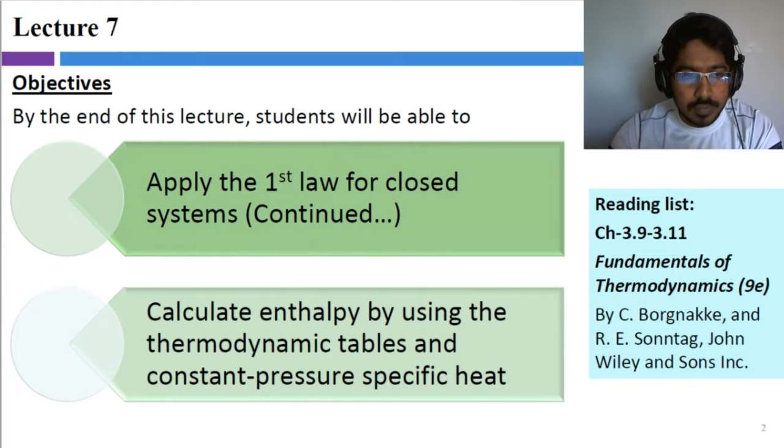Okay, here is some information that you were looking for about the midterm. So this 60-minute time frame, I will increase it. This is the number that I originally planned, but hopefully I'll increase it. And the midterm exam is 35% of the total final grade. And as I mentioned earlier, there's a mock exam uploaded for a paper-based exam. And then one question was uploaded in the Canvas quiz format, right? So that you can go there and practice yourselves. And please make sure that you have a PDF scanner to scan your answers, right?

This exam is not like the previous one, right? Sorry, give me 1 second. 29th. Okay, sorry, my bad. It should be rectified as 28th. It's on Friday, definitely. This one is wrong, and 28th, right?

So then you have to keep a PDF scanner, and when you are doing the mock question in the Canvas, you can use the PDF scanner and scan your workings and upload it there, so that you know the process beforehand. Otherwise, don't wait until the last moment and until the exam to test your technology. That will get you into trouble, right?

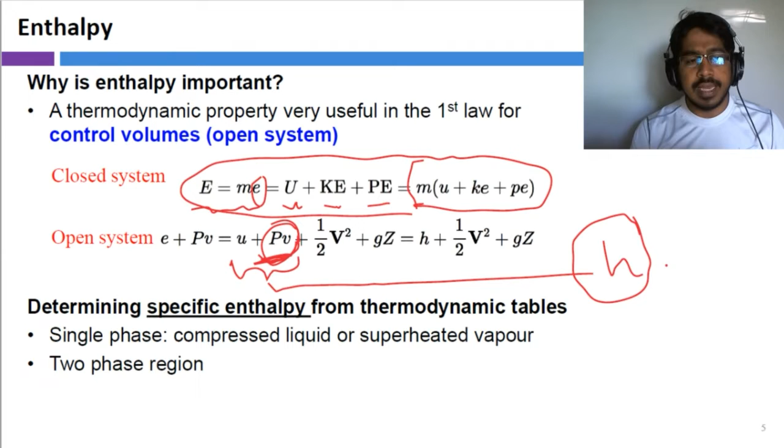So determining the specific enthalpy from thermodynamic tables is very similar to what we did with internal energy and specific volume. Basically, you are going to use the same set of tables, and when you go there, in the compressed liquid tables, we have this enthalpy column, right? So it is nothing different than finding internal energy, which is right next to it, and nothing different than finding specific volume right next to it, right?

So if you have the temperature and the pressure, you check the temperature, you check the pressure, and then you grab whatever the required enthalpy is, right? It's the same with superheated vapor as well. There, if you have 100 Celsius as your temperature and 10 kilopascal as your pressure, then your enthalpy is going to be this one, right?

So now you can see finding this property from superheated tables or compressed liquid tables is nothing different, and it's the same for two-phase region as well. So basically, if it is water, we have pressure and temperature entry tables. So we use the same usual procedure that we followed to find our internal energy and specific volume, right? Enthalpy is no different in the sense of identifying the values from tables.

Now, for internal energy, we develop these two relationships, right? And what we see down here is the very same relationships apply for the enthalpy as well. So if you want to find the quality of a mixture, can you use enthalpy instead of specific volume or internal energy? Can you do that? Yes, definitely you can, because these relationships are the ones that we used to find the quality and to find the states when the quality is available and all that, right?

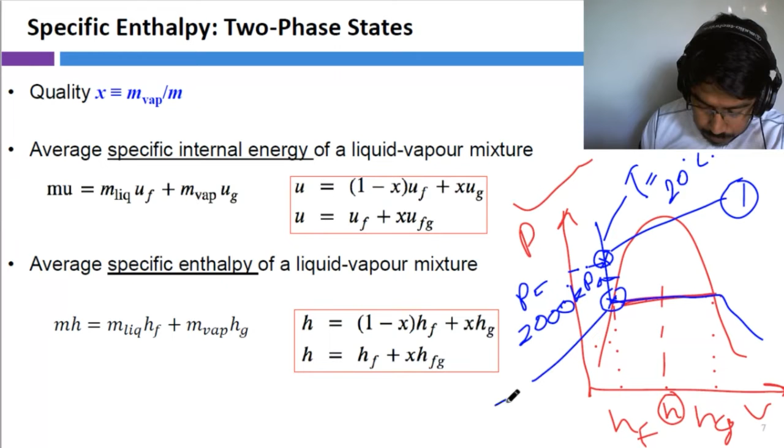So if it is in compressed liquid region, you know that for some substances, we don't have a comprehensive set of compressed liquid tables. So in that case, can we assume enthalpy at point 1 to be equal to enthalpy at point 2? Can we do that? We can, right? So now it brings us to an interesting point where we were able to use vf, uf, and hf to represent the property values in the compressed liquid region at a given temperature. Are we all clear?

Perfect. Now moving on. Here's the next new parameter that we are going to introduce today. What is constant pressure specific heat? It is the energy required to raise the temperature of a unit mass by 1 degree in a constant pressure process, right? So in the previous definition, to find constant volume specific heat, our goal was to have a setup which is constant volume, and then we put unit substance inside there, increased the temperature by 1 Celsius, and measured the energy needed. That was called constant volume specific heat.

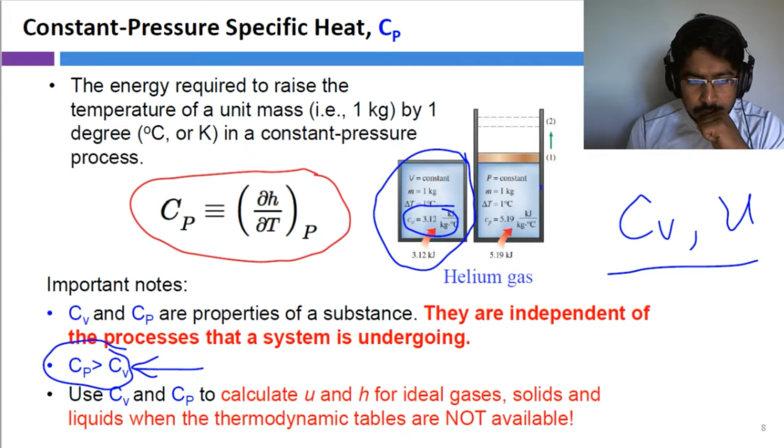So anybody feeling that we are going too fast or too slow, or the pace is good? Any ideas? Are we going good? I mean, okay, perfect. All right.

So when it comes to solids and liquids, they are nearly incompressible, right? Therefore, when there's no compressibility involved, then we can say that dH and dU roughly equal C dT. So what does this mean? Then Cv and Cp become one value for solids and liquids, right?

This is one confusion some students had throughout the years, like why do we have Cv and Cp? Because we used to know specific heat as one parameter during our school time, and we used mc theta all the time. We never had to worry about Cp or Cv because you were applying those equations to liquids or solids, right? When it comes to gas phase or vapor phase, then only we have these two different parameters: constant volume specific heat and constant pressure specific heat.

Because gases are not incompressible, they are compressible, right? They change their volume significantly. Therefore, in those cases, Cp and Cv are not equal to each other. But when it comes to liquids and solids, then those are equal to each other, right?

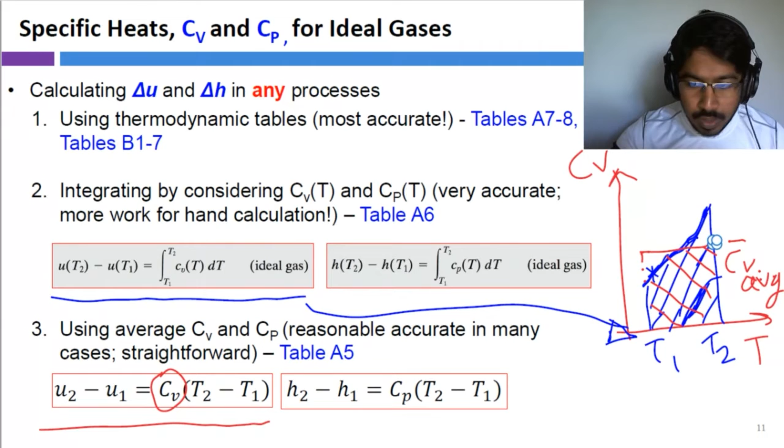Okay, all good with this slide? Now moving on, right? So...

Now we learned that Cp can be written as this for ideal gases, right? For real gases, you cannot write Cp equals Cv plus R. For an ideal gas, there's another important parameter, very important: specific heat ratio. Specific heat ratio can be represented by K, or you might see gamma down the road.

K or gamma may be used to indicate specific heat ratio, but either way, the definition is the same: Cp divided by Cv. So it could be Cp divided by Cv at a given temperature, or it could be the average Cp divided by average Cv. So it could be either way.

Whatever it is, what can we say about the magnitude of this K or gamma value, specific heat ratio? Is it greater than 1, equal to 1, or less than 1? Can you comment for an ideal gas? Is it going to be greater than 1, less than 1, or equal to 1?

So I will write greater than 1, equal to 1, less than 1, right? It is always greater than 1. Because why? We derive this relationship, right?

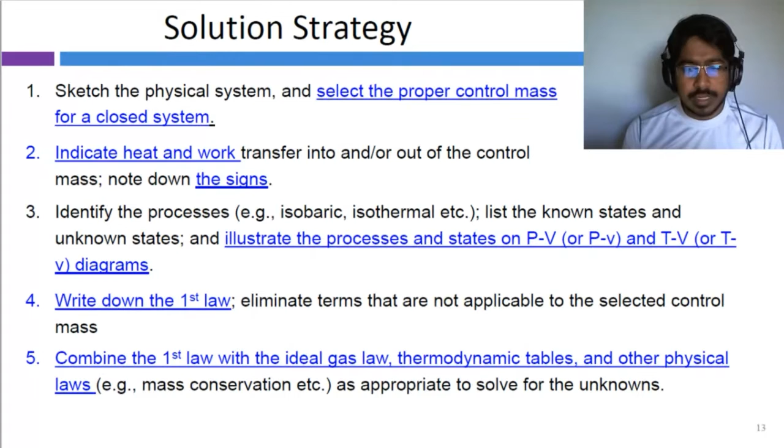After finding the necessary states, we go to step 4: write down the first law and eliminate the terms that are not applicable to the selected control mass or process. If it is an adiabatic process, there's no point considering heat transfer. If it is an isothermal process, the internal energy is not going to change. Likewise, we keep things like that in our head and move forward. Then, as necessary, we can combine the first law with the ideal gas law or property tables, depending on the conditions of the substance, to find the missing parameters or other required components. So this is a summary of the solution process we can use.

Now I want all of you to try this question. Please try this example 1, take 5 minutes and try to solve it, and we'll discuss it in 5 minutes altogether. Perfect. So...

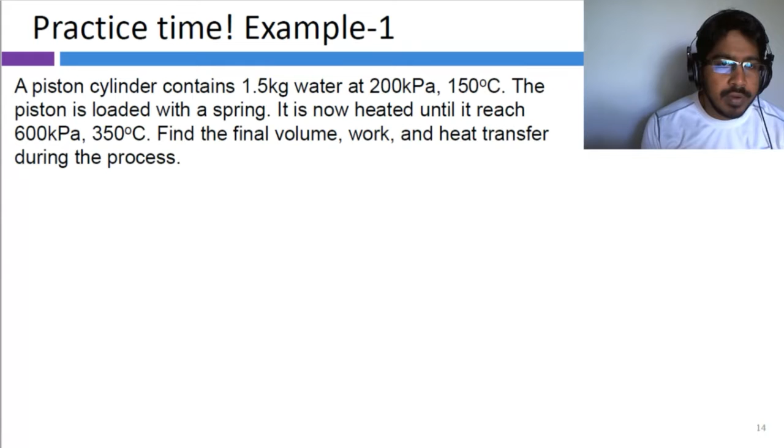This question is about a piston cylinder mechanism that contains 1.5 kilograms of water at a given pressure and temperature. If I were to draw the piston cylinder mechanism, it's right here, and then I have a piston inside this setup. So this is the piston, and in addition to that we have a spring that is adding force on the piston. Inside the chamber we have water.

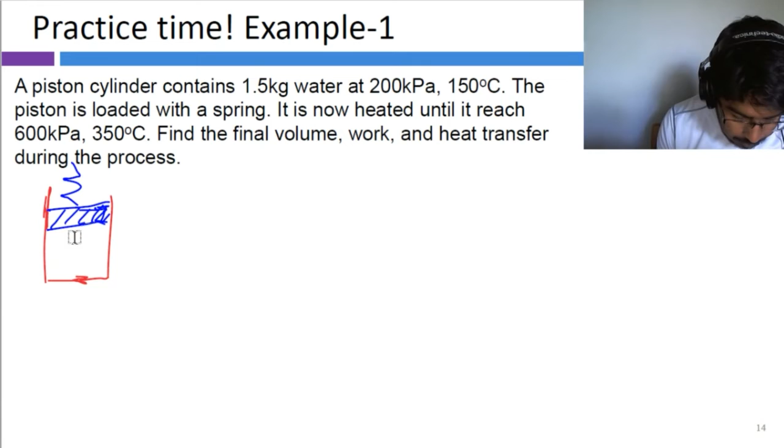What are the details of this system? This is state 1. At state 1 we have m equals 1.5 kilograms, p equals 200 kilopascals, and temperature equals 150 Celsius. And then in state 2 we have the same setup.

We have the spring and the piston, and the state information is given as well. Again, inside the cylinder there's the substance water, and pressure is given, this is P1 and T1, and now we have P2 equals 600 kilopascals and T2 equals 350 Celsius. What can we say about the mass in state 1 and 2? Is it going to be the same or different?

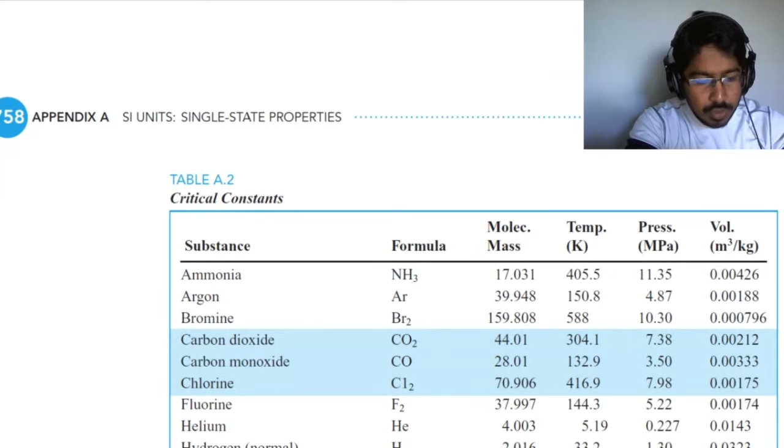To find the final volume, we have to go to the property tables. We have been provided with the pressure and temperature, so it should not be a challenging task, right? So as usual, we go to property tables with our temperature and pressure. So our pressure is 600, temperature is 350. So we can either start with temperature or pressure entry tables. We'll type water.

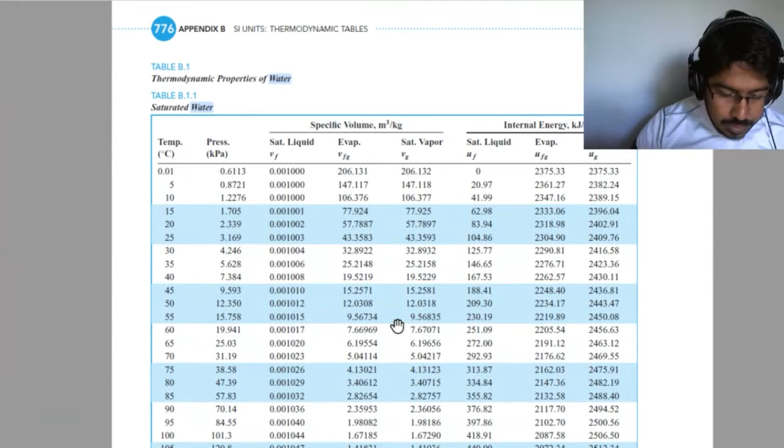Saturated water. Okay, so we found the temperature entry table first, so we'll start with that one, and we'll try to find our temperature, which is 350 Celsius, right? There we go. Saturated water, 350 Celsius. Here we go. We have 350 Celsius at this point, right? And then our pressure was 600 kilopascal, right?

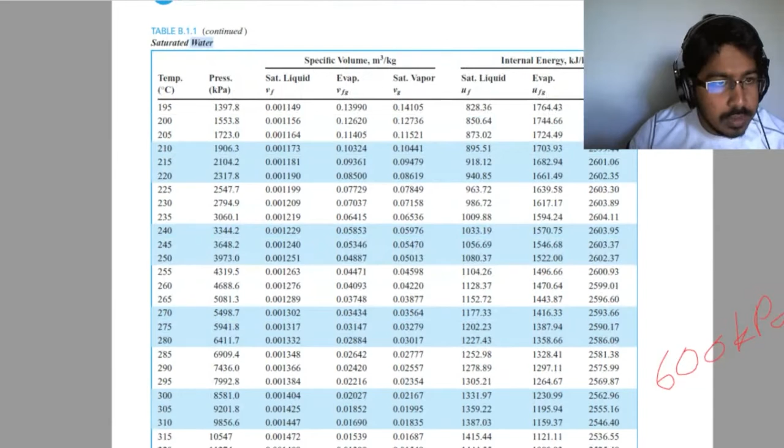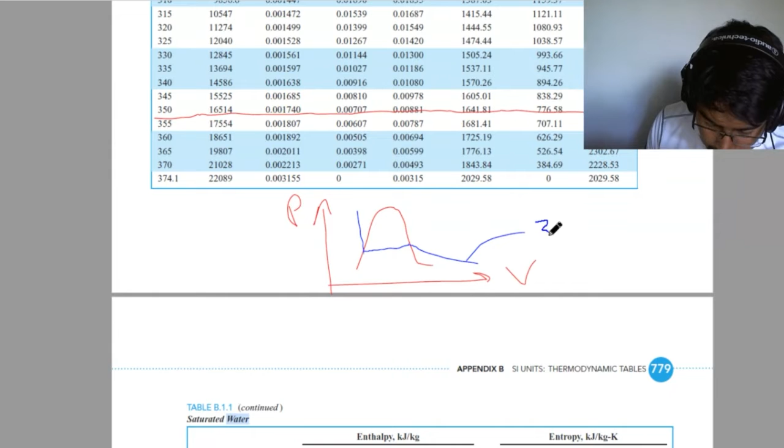Then the saturation pressure, the second column is the saturation pressure of this given substance. So saturated water, and the pressure is given in kilopascals. So if we draw our PV diagram here, and this is our dome. And if we draw an isothermal line, it's going to be like this. And the temperature here is 350 Celsius. And then there we can check the saturation pressure.

It is given as 16,000 kilopascals, right? And our pressure is what? It is 200 kilopascals. What can you say about our pressure? It is definitely less than 16,000 kilopascals because we have 200 kilopascals, right? So then looking at this, what can you say about the state of our substance? This is 200 kilopascals, right?

So where did I get 16,000? So 16,000 is from here. This is 16,500 something. So I just put 16,000 here, roughly. You can grab that value. Okay. What can you say about the state of our substance? Is it compressed liquid, superheated, or in two-phase region? Anybody? It is definitely in superheated.

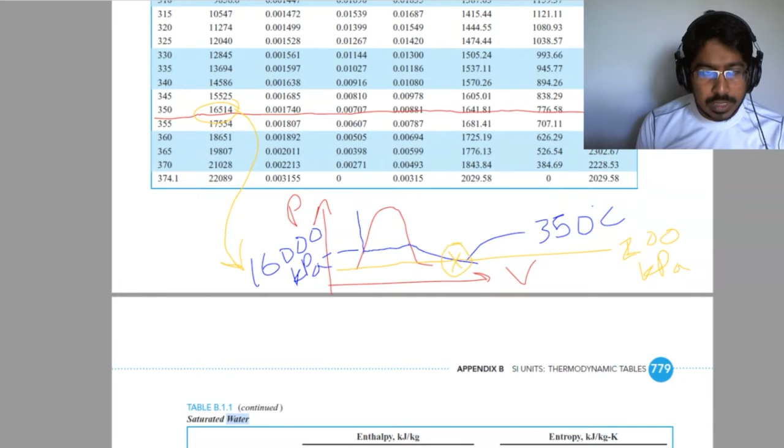Excellent, George. Excellent, Scott. So we get this intersection point, where our pressure and temperature is available, right? So the substance can exist in this temperature and pressure only in superheated region. Therefore, now we know that it is not in two-phase region. It's definitely in superheated region. Now we have to go back to superheated tables.

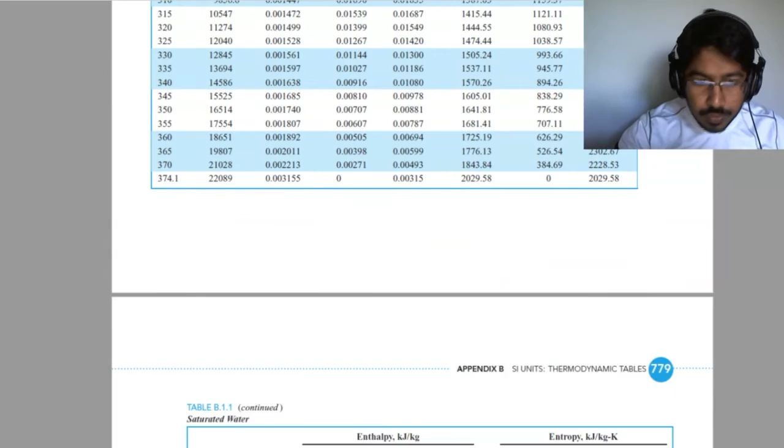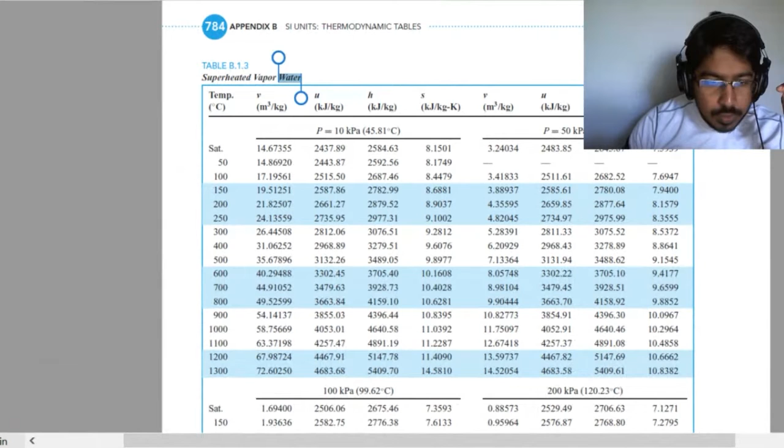So I will use the same search, superheated water. Now we'll zoom in, and our pressure of interest is 200 kilopascals, right? So let me quickly try to find 200 kilopascals. It's right below here, 200 kilopascals. And now we need to find our temperature. It was 350, right? No, it was 150. Sorry. No.

Sorry, in the previous explanation, I checked 350 Celsius and 200 kilopascals, which is wrong because state 2 is the one that we are interested in. It was 350 Celsius and 600 kilopascals, right? Still, that is in superheated region because the pressure that we have here is less than the saturation pressure, 16,000. 600 is also less than 16,000. Do you guys understand what I mentioned? I accidentally picked 200 kilopascals as the pressure. It was wrong. We should have checked 600 kilopascals, but the decision would have been the same, right? The same procedure. Okay.

So if you have any question, confusion, no. We cannot use state 1 to find the properties of state 2. We have to use state 2 parameters. What I tried to mention is when we draw our PV diagram, there we had our isothermal line. So this was the 350 Celsius isothermal line, and we had our saturation pressure around 16,000.

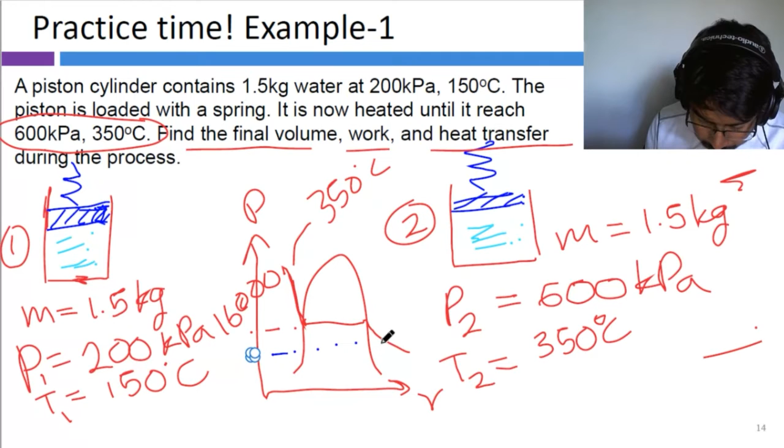And if we had, oh, this does not allow me to change the color. Okay, now it's good. If we had our pressure as 600 kilopascals, we'll be meeting it in the superheated region. Therefore, we should look into superheated region, right? So the pressure should be 600 kilopascals, not 200, for this state.

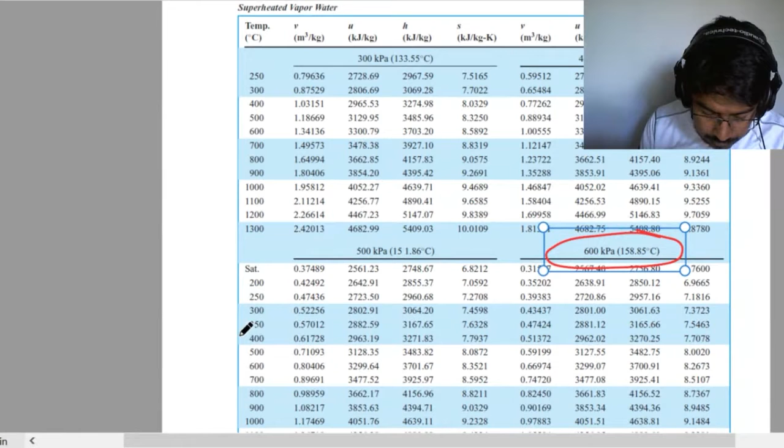Okay. Now we'll try to find 600 and 350 Celsius. No, there's no order for finding states, George. You can either start with 1 or 2. It doesn't matter really. Perfect. Now let's go back to our discussion. So we'll not be looking at 200. We should be looking at 600 instead, because that is the pressure that we should be looking at. And we find our 600 kilopascals here, and 350 Celsius is here.

So you see that the third column here is the enthalpy column, this is internal energy, and the first column is what we are interested in as of now, specific volume, right? So specific volume at this point is 0.47424, right? This is the specific volume at this point. Everybody clear about how we did that?

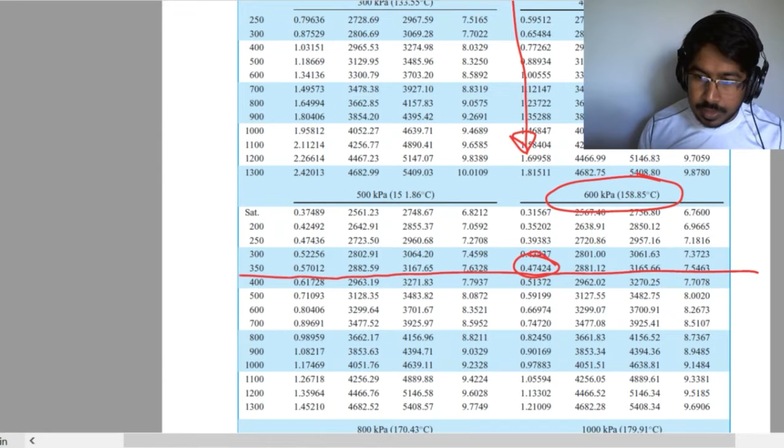Okay. And then in this question, the question asks us about the final volume, right? Now we have our v2 value found from the table, and to find the final volume, we can multiply this final specific volume by the mass of the system, which is 1.5 kilograms, right? And then after finding the final volume, the question asks us to find the work, right?

To find the work, we can use the known relationship P delta V, right? So how do we use this equation? Like the integral of P dV, right? In order for us to use this one, we need to know the specific volume at state 1 as well, right? And then if we know these two, we can go and find the work. And then the question asks the heat transfer, right?

It is very important to know that heat transfer, unless given in the question, we cannot find from the property tables. So in our first law, delta U equals Q12 minus W12, right? So we already found W12. I mean, we have not calculated it, but we have found a way to calculate W12. But we do not have a way to calculate Q12 as of now.

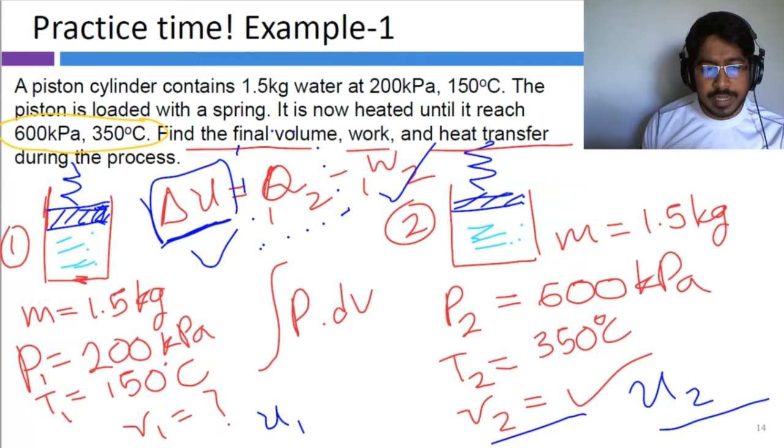So now you remember for v2, we found the specific volume to be this number, and right adjacent to it, we had the internal energy. So we already found these two, right? And can you try and find v1 and u1? Please find these two from property tables. Try and see whether you can identify the state of the substance at the initial condition, whether it's in the saturated region or in the superheated region, and use the appropriate table and see whether you can come to this number.

So state 1 is 200 kilopascals and 150 Celsius. This is state 1, right? Take 2 minutes and try to find this one. If anybody already has found this one, please let me know, and if you had any challenges or not. Okay, perfect. So everybody finding it good? You can find v1 and u1 as well from the tables.

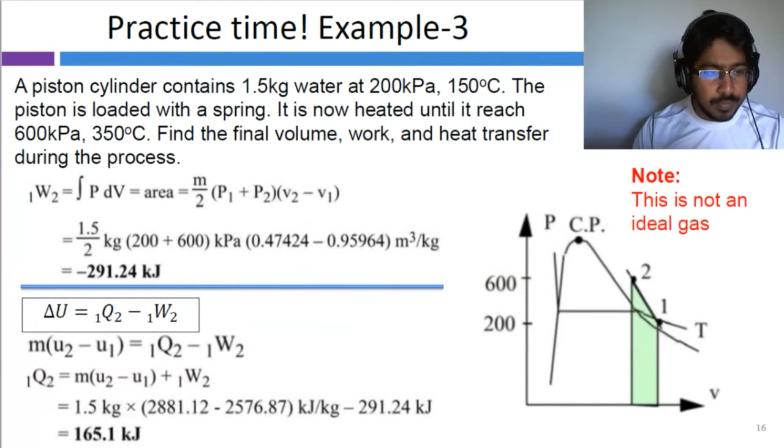So you can do it that way, or you can just remember by contracting. If the system is contracting, then the work is done on the system. If the system is expanding, then the system is doing work. Perfect. Now, so when you are calculating the work, in addition to the area of the trapezoid, we have M, the mass of the system as well, right?

So if we did not know the mass of the system, then what we would have done is calculating the specific work, right? Work done per unit mass of substance. But in this case, we know the mass, therefore we can add it. So we get the answer in kilojoules. And importantly, we have a minus sign here, right? So the work is being done on the system.

And here, if we did not have the mass and we used the area, then what would be the unit that we are getting for the answer? The unit. If we did not have the mass and if we did not multiply by the mass, it's going to be kilojoules per kilogram, right? Because it's per unit mass, right? The work done per unit mass. In this case, we multiplied by the mass, therefore it's just the total work done by the substance or the system, right? Now the next step is easy.

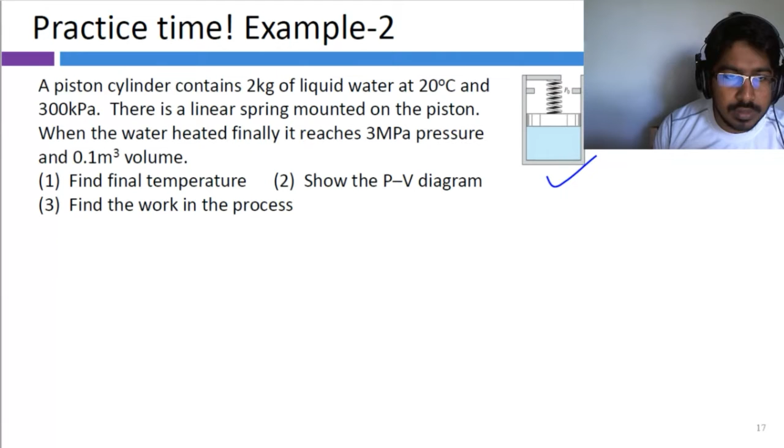Therefore, it's easy. A piston cylinder mechanism contains 2 kilograms of liquid water at 20 Celsius. So the first state is given, right? It's liquid water, so we don't have to worry. If it was just water, then we have to check the state. So 2 kilograms of liquid water, the initial state. State 1, M equals 2 kilograms, T1 equals 20 Celsius, and P1 equals 300 kilopascals. So in this case, the state is liquid.

Now at state 2, the pressure is given. T2 is not given. P2 is given to be 3 megapascals, and V2 is given. V2 equals 0.1 cubic meters. Can we use this total volume in the property tables to find the state and whatnot? Can we do that? Anybody? Any idea?

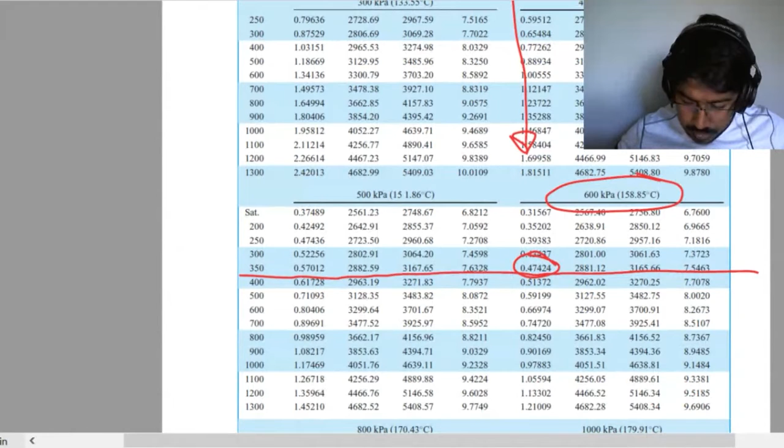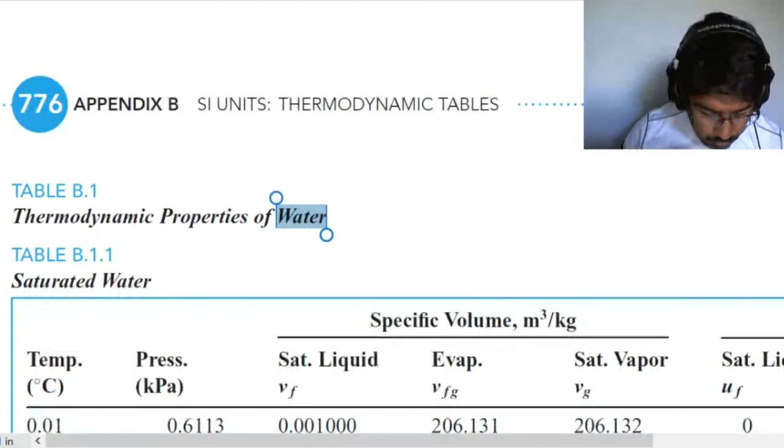Okay, now we go there and we go for the pressure entry table. 3 megapascals means 3000 kilopascals, right? Now saturated water, pressure entry. Now we found 3000. This is the set of properties for 3000 kilopascals or 3 megapascals. And there VF and VG values are in the third and fifth columns.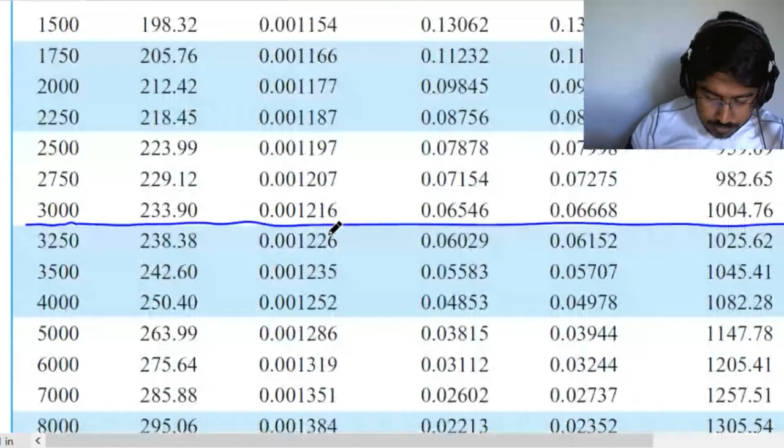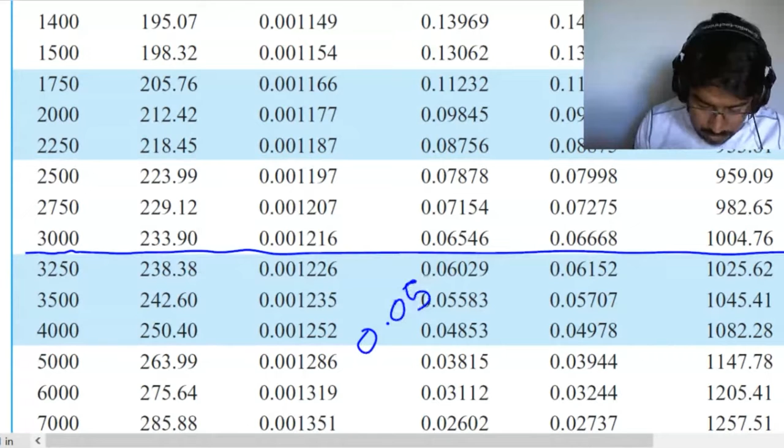So our specific volume value, we know that it was 0.05, right? So what can you say about our state by looking at these specific volumes and our given conditions? Excellent. So it is in two-phase region, right? Because ours was 0.05 and definitely 0.05 is less than 0.06 and higher than 0.001216, right? Therefore, we know that this is in two-phase region.

So now to find the temperature at state 2, it's very easy. And we know that it is 233.9 Celsius. So state 2 temperature, 233.9 Celsius. Okay. Now we know that, and we know that it's a two-phase mixture. And what else do we need? Find the final temperature. Done.

And we need to draw the PV diagram, right? So when we draw the PV diagram, we start with V1. V1 was found to be 0.001 and V2 was 0.05. So this is an expansion process. The volume has increased. Therefore, our V1 is here and V2 is going to be here. And then we mark the process like this. When you are marking the process in an exam, please mark the arrow to indicate the direction. Even in the solution, we have not indicated the arrow. So please do mark the arrow. Mark the initial state, mark the final state, mark V1, V2, and P1, P2, and then mark the process direction.

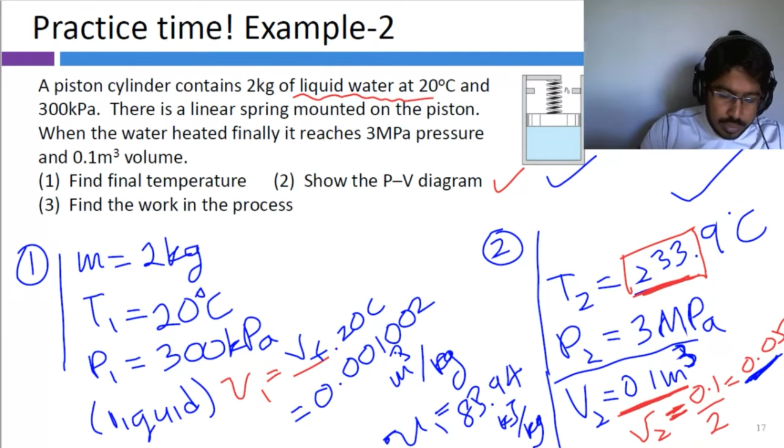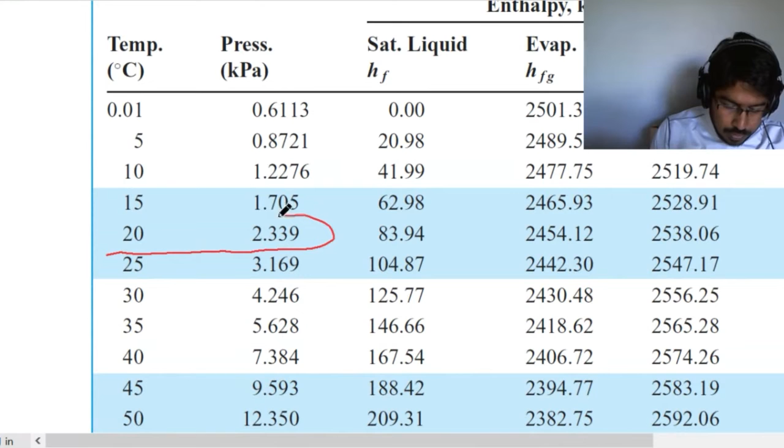So, okay, at state 1 it says liquid water, right? If you are not sure whether it's liquid water, you can take the state parameters 20 Celsius and 300 kilopascals, and you can start with saturated water temperature tables, and then you browse 20 Celsius, right? So this is going to be your saturation pressure, and then you can try and draw a PV diagram in this case, and this is the dome, and you could try to draw an isothermal line.

So isothermal line for 20 Celsius, right? Our interested pressure is 300 kilopascals, and the saturation pressure is this value. So definitely 300 is somewhere here. So we can make sure that it is in compressed liquid region. And then you can get the VF value as well, right? But in the question it said liquid water, so we directly assumed it is in compressed liquid region. If you are not sure, you can always go and check using the basic principles that we already know.

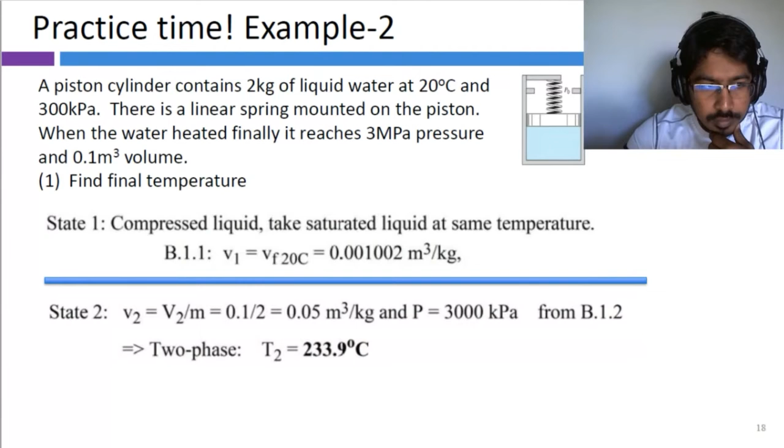Okay. Any other questions? Anything not clear about the solution process? It's very good that you ask questions, right? That is how we all learn. Sometimes when I am in a class, if I do not ask questions, when another student asks a question, then I see, oh, even I did not understand this part, right? So that's why it's important that you all get involved, ask questions and be engaged in the lesson. Okay, are we all good with this one? Or do we have any more questions?

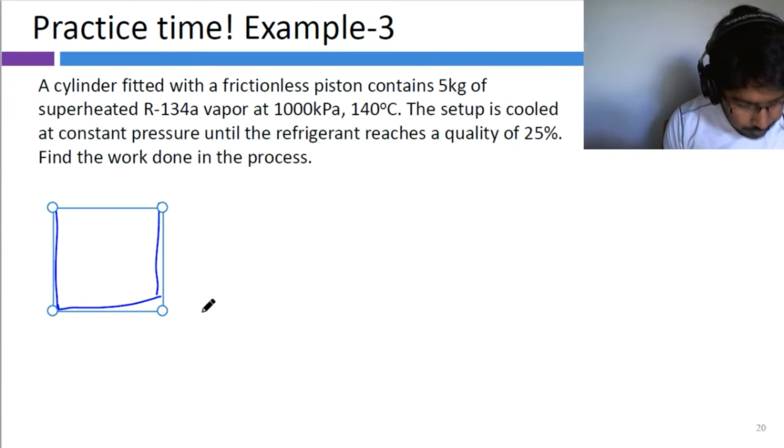So a cylinder fitted with a frictionless piston contains 5 kilograms of superheated R134A. This is another common mistake that students do - don't assume everything is water. It is not always water. There are other substances in the world as well. So check whether it's water or some other substance.

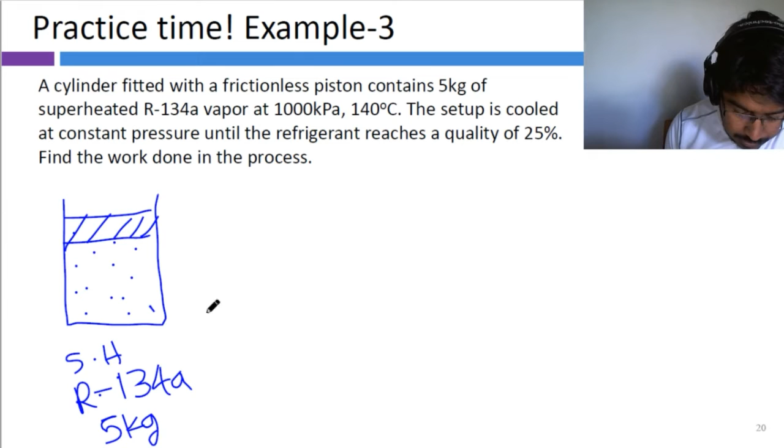This one has R134A, and the pressure at state 1, P1, is given as 1000 kilopascals, and T1 is given as 140 Celsius. Now the setup is cooled at constant pressure until the refrigerant reaches 25% quality. Since it is being cooled at constant pressure, the pressure is not going to change. Therefore P2 equals 1000 kilopascals again, and X is given to be 0.25.

Now, these are the information that we have. By looking at state 2, what can we say - is it in the saturated or two-phase region, superheated region, or compressed liquid region? State 2 is two-phase, because there's a quality defined. If it is outside the two-phase region, the quality would not be defined.

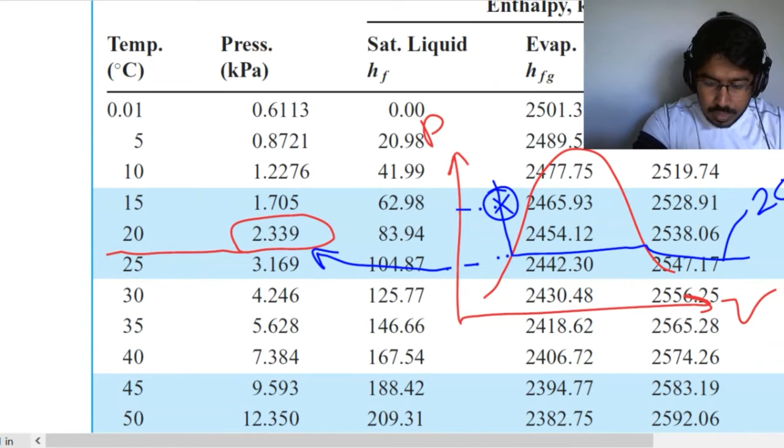So now, we have to go to the property tables and look for 1000 kilopascals and 140 Celsius at superheated conditions for R134A. I go to my property tables and type R-134, and wait, give me a second.

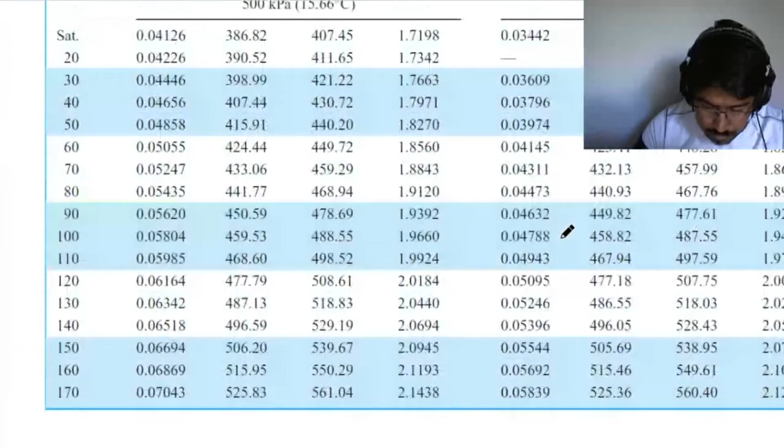Okay, R-134. Now saturated tables are popping up, but I am interested in superheated as of now. My pressure of interest is 1000 kilopascals and temperature is 140. So I'm going to look for 1000 kilopascals. I'll scroll down until I find it. Here we go. We have 1000 now, and the temperature was 140. At 1000 and 140, it's right here, 140 Celsius.

Okay, let me use another color. Now we have 140 and 1000 is right here. What we are interested in is specific volume. We can directly grab that from here, right? Any issues so far, or are we good with that one? How we found the state at state 1 specific volume. Perfect.

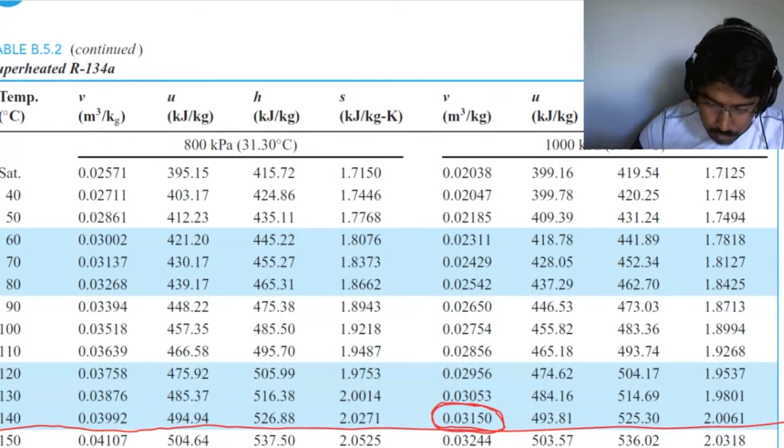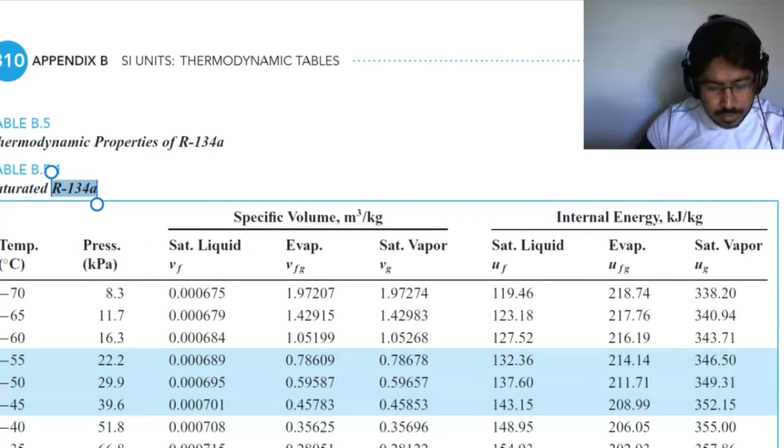Now for state 2, we know that it is in the two-phase region, right? So there we have the pressure given, so we need to find 1000 kilopascals. Now we'll go to the property tables and try to find the saturated tables for R134A. Saturated R134 is here, and the important thing to note is for every substance, we don't have pressure and temperature entry tables.

It was only for water, as water is used frequently in calculations. Therefore, we have to deal with what we have here. For R134A, we just have temperature entry tables. Otherwise, we would have picked the pressure entry and located 1000 directly, but unfortunately, we don't have that luxury here. So now we have to locate the appropriate bracket that contains the pressure.

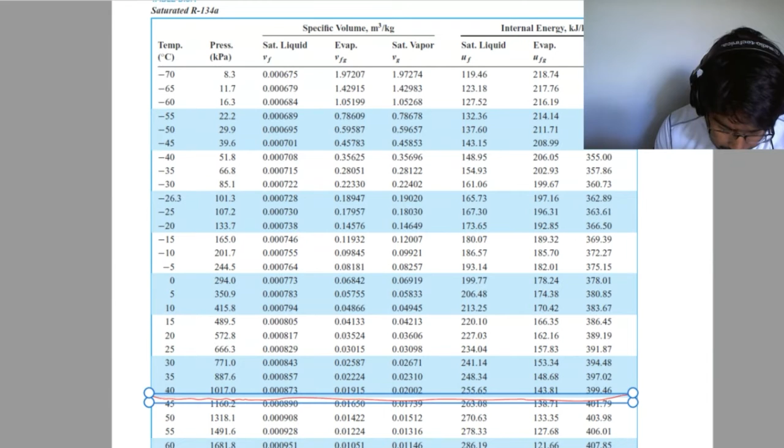Okay, now look at this one, and you know that 1000 is between 887 and 1017. So this pressure bracket definitely contains our 1000 kilopascal value, right? Everybody agree? Anybody having doubts about that?

Okay, so now after that point, we need to find the specific volume, right? That is what we are interested in. So in order for us to find the specific volume of a mixture, we need to find Vf and Vg both. So we have two ways of doing this. We can interpolate for our Vf value at 1000 and Vfg value at 1000, and then use these things to calculate our final specific volume. So we can find our final specific volume at 1000 as Vf at 1000

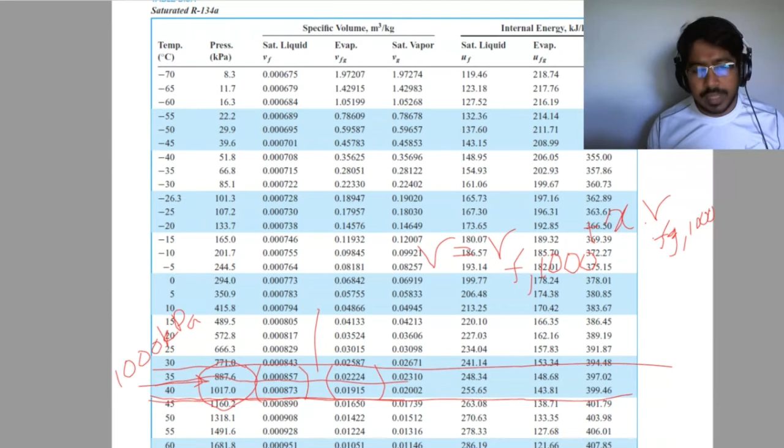plus X already known and Vfg again at 1000. So we could have either done that, or we could find our average specific volume at the given quality at this condition, and average specific volume at that condition, and then interpolate to find the average specific volume at 1000. You know what I mean? So there are two approaches that we could take. Either works, that's what I'm trying to say.

Okay, let's go to the solution here. So this is what I was telling. At 1017, for this given quality, we can find the specific volume like this. We get the Vf at 1017, and we get the X that is provided in the example, that is 0.25, and then we get Vfg at 1017, and we calculate the average specific volume at 1017.

Similarly, we can calculate the average specific volume at 887 kilopascals. We take the Vf value there, and we get the X and Vfg here for that particular pressure, and then we get the average specific volume at that condition.

Now we have two specific volume values under these given conditions. What we are interested in finding is the average specific volume at 1000. So we can get these two values and then use the pressure values as X values and specific volumes as Y values, and substitute in our interpolation equation to find our final answer. In this solution, the 0.000871 is the average Vf value, interpolated Vf value at 1000, the first approach we discussed, Vf 1000, and this is Vfg 1000.

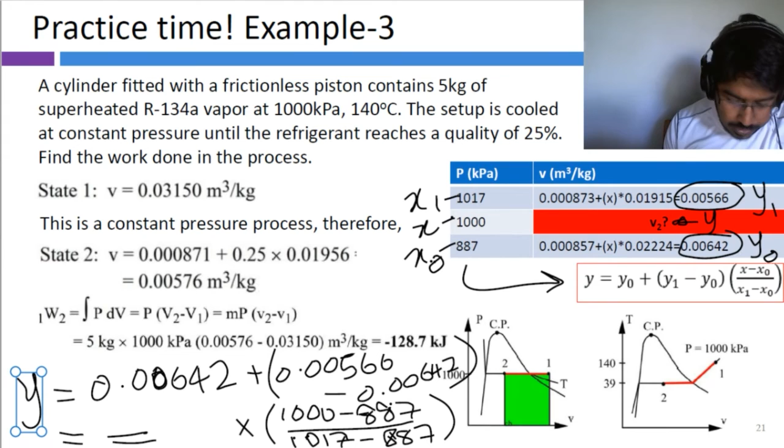So if you solve this equation, you will get your final specific volume. Did I make sense, Jacob? Perfect. Okay.

So you remember for enthalpy also we have the same relationship, right? You can compare the enthalpy value you have with HF and HG and determine whether it's in two-phase region, superheated region, or compressed liquid region. So it's the same idea as internal energy or specific volume.

So you can discuss the answers at this point. I don't have an answer key for this one. You have many questions with the answer keys in assignment 1 and 2, so you can check for the answer keys there. We can discuss this in the class right now. Okay.

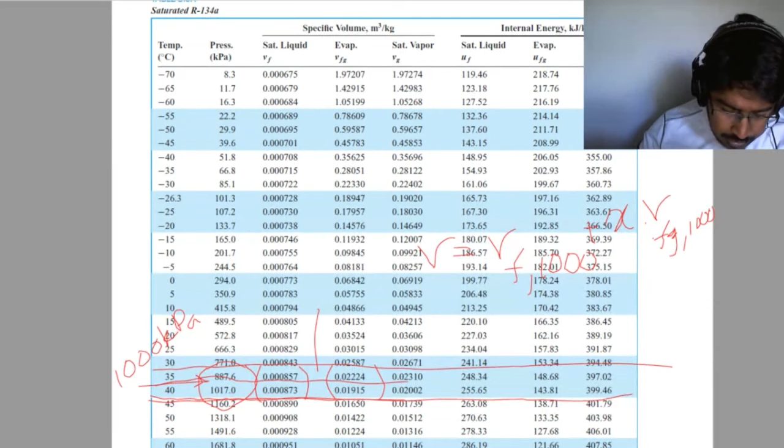And the pressure, no, temperature given is 40 Celsius, right? So now the interested state is here. It is 40 Celsius.

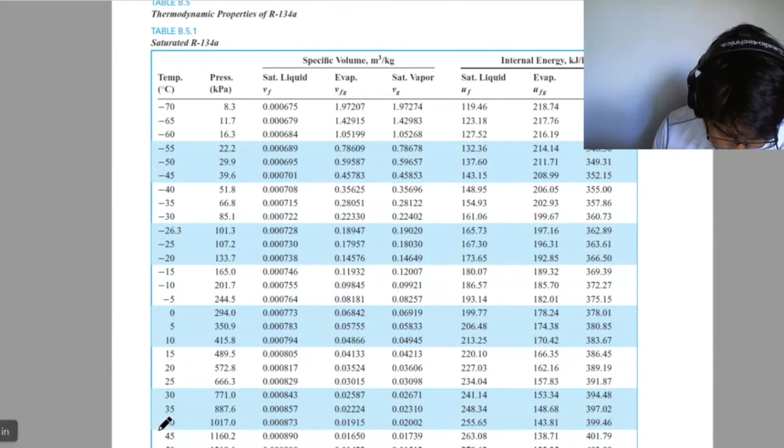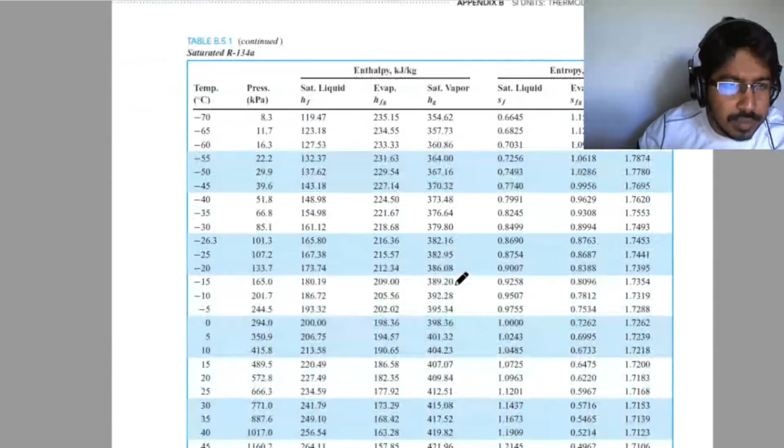And importantly, this table does not have the enthalpy value. So in an exam situation, don't panic. Just scroll down. There should be another table that has the enthalpy values, right? Here you see that now we have enthalpy. So for every substance, you have enthalpy and all these parameters. So if you don't see it in the current table, don't panic, just scroll down, right?

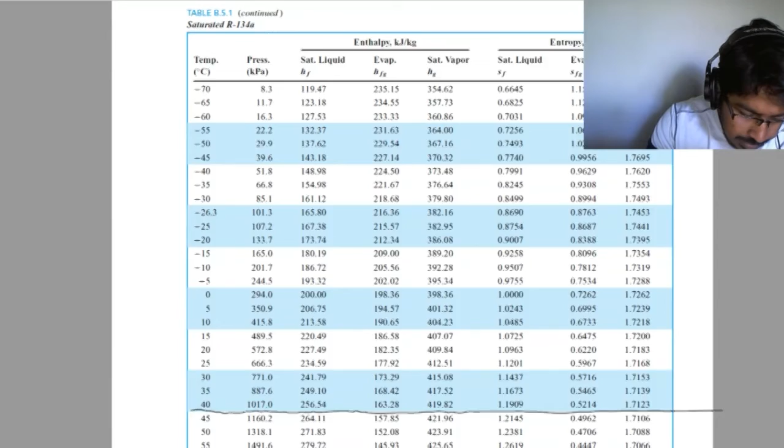So now 40 Celsius, we draw this line. Our enthalpy value was 426. So 426. Now we look at HF and HG.

HF and HG. Right. So by looking at these two values, what can we say about the state of this substance? It is superheated, right? Excellent. Because this one is 426, and 426 is higher than our Hg value. So that means we have to go for superheated tables, right?

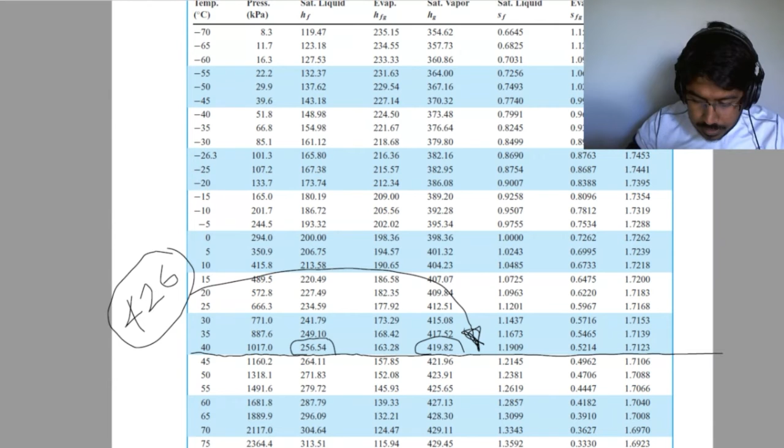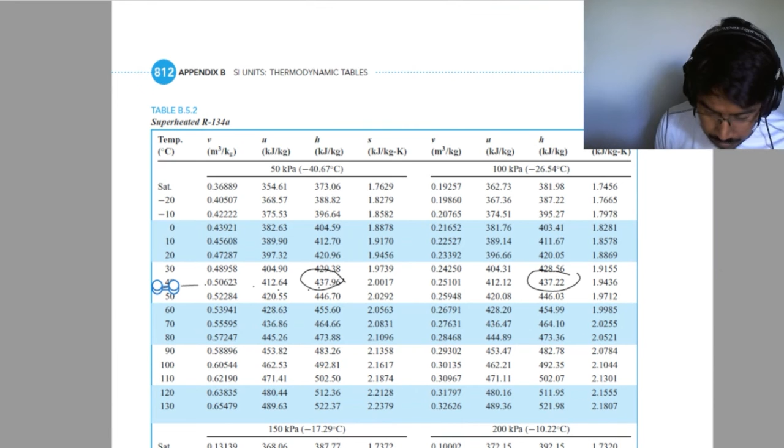So we again look for superheated tables now, and saturated superheated tables. Okay. Now we have to find our 426 for this given temperature, right? Now at 40 Celsius, we look for our enthalpy value. It is 437 at 50 kilopascals, and it is 437.22 at 100 kilopascals. So our interested value is 426.

Now we have to find 426 at 40 Celsius, right? So again we check for this temperature. It is 40 Celsius, 150 kilopascal, but we get 436. But we are interested in 426. It is not even close here, right?

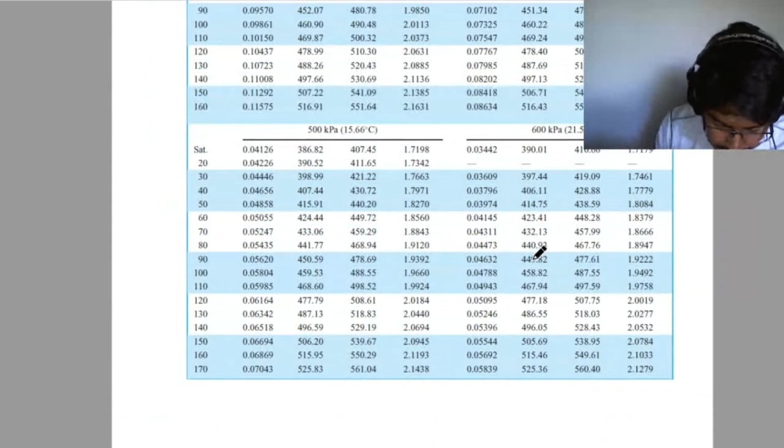So now we found the bracket, right? The enthalpy value that we have, enthalpy and pressure, right? And the other parameter we are interested in is internal energy, right? So this is what we need to find.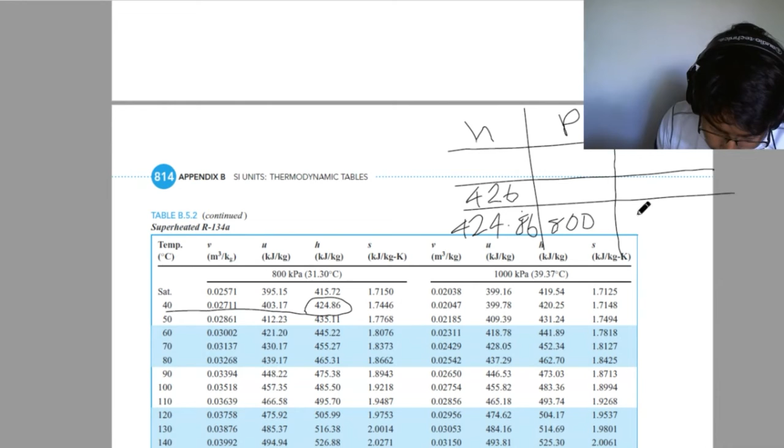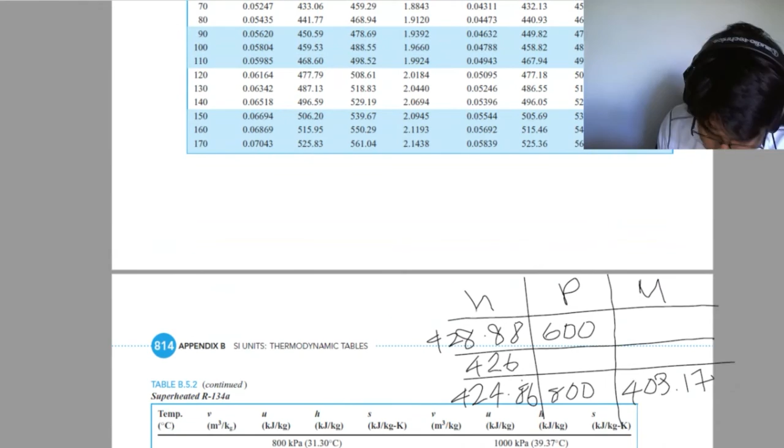At 600 kilopascals, we have 428.88 as our enthalpy value. 428.88, right? And the pressure is 600. And the internal energy value, let's grab that one as well. It is given in this column. So it is 406.11.

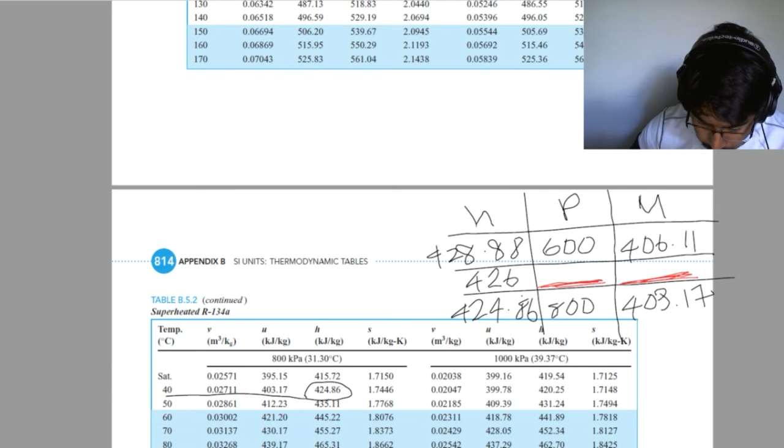Okay, now we need to find the pressure and internal energy. In order for us to do this, this is a matter of interpolation now, right? So we can get this information into our question and start our solution process. Copy. Can we paste it here? No, we cannot paste it, but we have it right here by the side. Can somebody interpolate for pressure and tell me what is the pressure value for this question.

So 743.28, everybody is getting that one. So then according to your friends, the pressure is going to be 743.28 kilopascals. And internal energy, anybody calculated the internal energy for this one? So 404 kilojoules per kilogram. As many of you are getting the same thing, I believe all of you are doing the right interpolation process, as we discussed earlier. It's simple, as we demonstrated in the previous example.

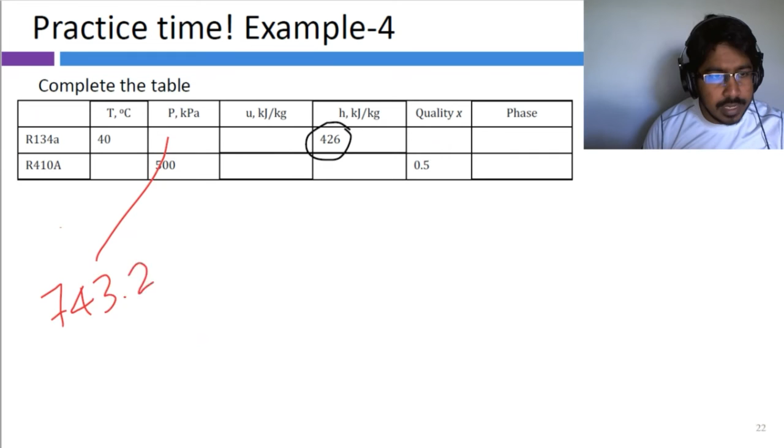Now we saw the first part, and in the second part, what do we have here? We have been provided with the pressure, and then we have been provided with the quality. Now, what does that say about the phase? It is two phase, right? So we can say that two phase. Now this makes our lives easier because we don't have to look for the superheated tables or saturated, we don't have to worry about that. We know that it is exactly saturated tables. We don't have the ambiguity of which table to use.

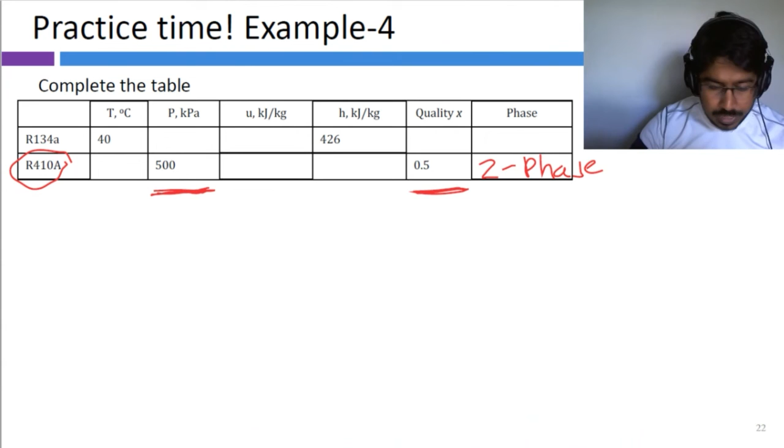So now we need to find temperature. We go to tables and we try to locate 500 kilopascals for what? R410A. So very important, R410A, the substance. This is a common mistake when you are dealing with one substance - then down in the road, maybe you will be using the same table in an exam situation under the pressure. Please be attentive to the material or substance. So now it's R410, I will search R410, right? So we'll go for R410 tables and saturated tables for R410.

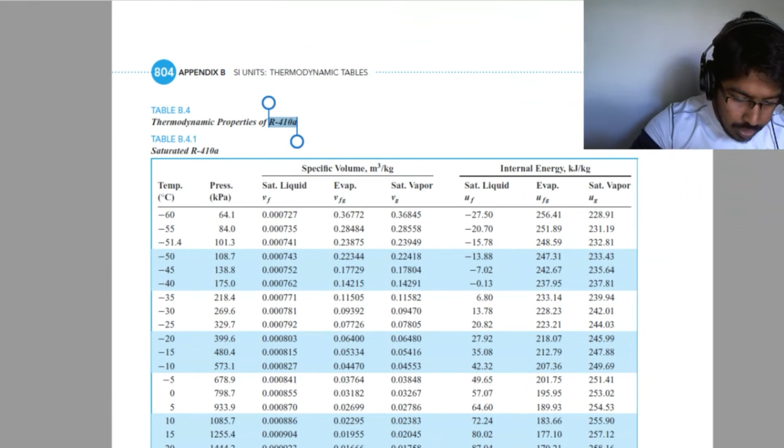And our pressure of interest is 500 kilopascals, right? So now for this one, 500 kilopascals, where can we find it? 500 is somewhere between these two numbers, right? So in this case, you remember how we did calculate and found the specific volume and internal energy for this kind of a situation in the previous question.

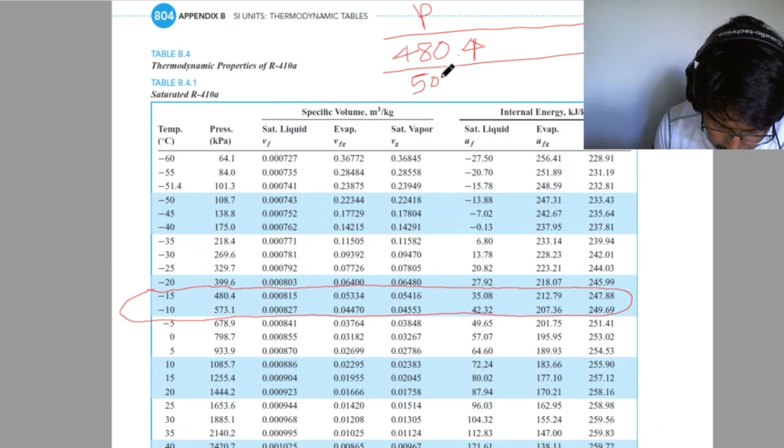So at this point, at minus 15 and 480 kilopascals, so the pressure is 480. 480.4 is the lower bound of the pressure, and we are interested in knowing what's happening at 500 kilopascals, and the other number given here is 573.1, right? And pressure is there, so you can find the average internal energy.

So UF is 35.08 at 480. So 35.08 plus 0.5, which is the quality, into UFG. UFG is 212.79. So let me write it in a concise manner.

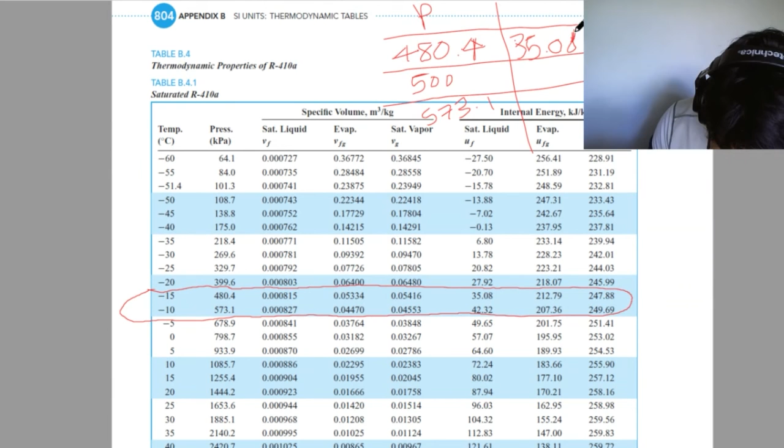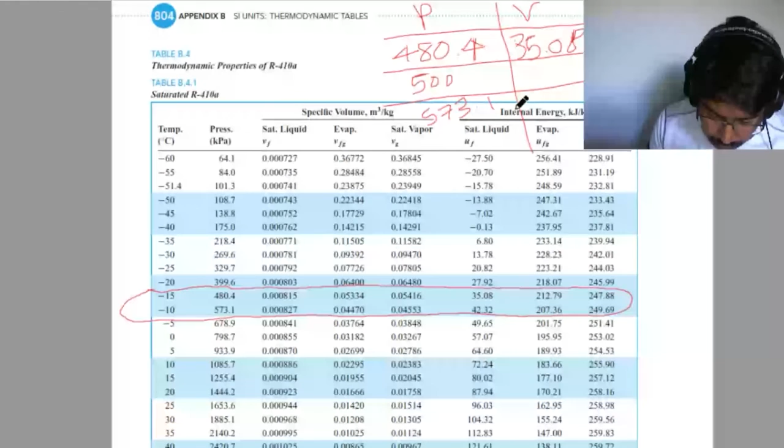This pen is giving me hard times for some reason. 35.08 plus 0.5 into 212.79, right? Likewise, you can calculate the average specific volume for this pressure, and then we can interpolate to find the specific volume that we needed. Or this is not specific volume, sorry, my bad - this is internal energy. You can use this same pattern to find the average specific volume at this state, and then we can interpolate to find this one.

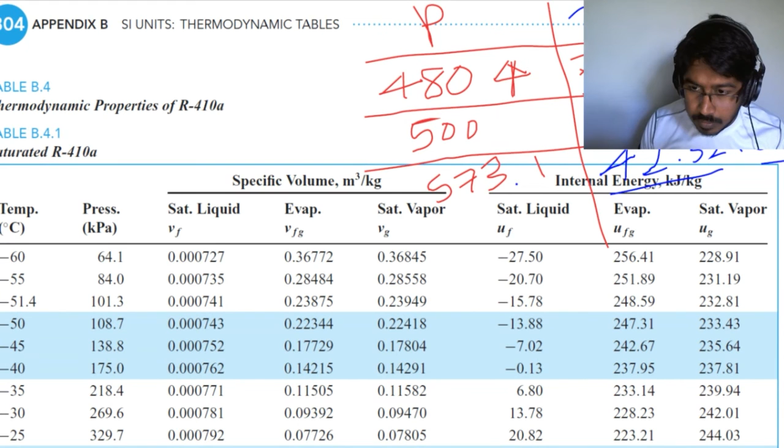Can somebody do the calculation for me? Anybody who's willing to do this? So at this point it is 146, and here what is it? What is the number? Can somebody do the calculation there?

141.475. And in order for us to do the interpolation, let's go back to the slide. Let's take a screenshot of this one, and then go. You also can take a screenshot of this one so that you have that one available for you while we are doing the calculation, right? And then let's do this.

So for different pressures, we got values. So P equals 480.4, 500, and 573.1. 480.4, 500, and 573.1. Right? This is pressure. And then we have our U values, which we got as 141.475, and now we have the bottom one, 146. That's our U value, right?

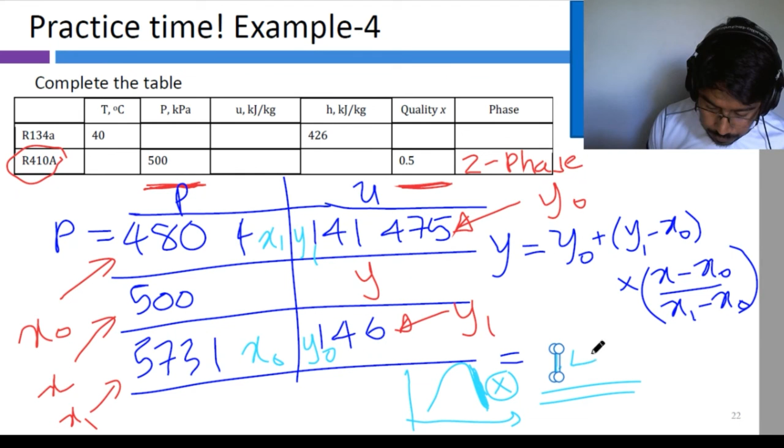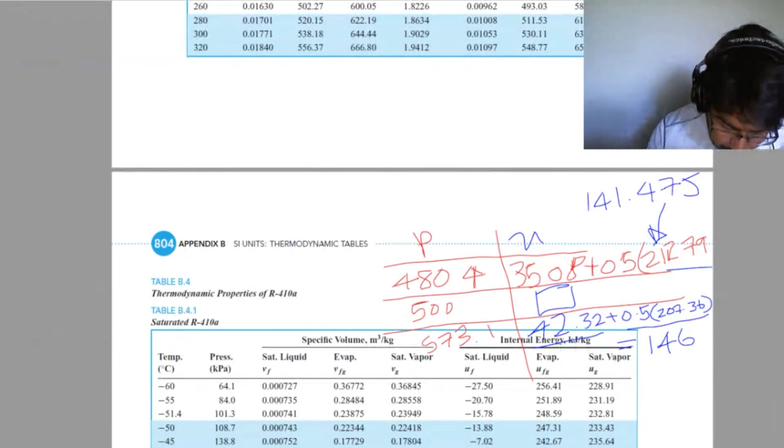Can we finish the table and get T and H quickly? So you can get the temperature values for these two as well. Now we have calculated U, therefore we can forget about U now, and start with temperatures. We'll pick the temperatures at 480.4. What is the temperature? Let's go up, and the temperature is -15 and -10. It's a bracket, so we pick -15 and -10 at 480, and this is the temperature that we are interested in.

So then, similar to the previous case, let's say in red assignment, we'll get rid of these ones for now, and this is y0, this becomes y, and this becomes y1. You can substitute the y1, y0, and y values in the interpolation equation, and then you get the temperature value here. If you want to solve, then you can get the answer there.